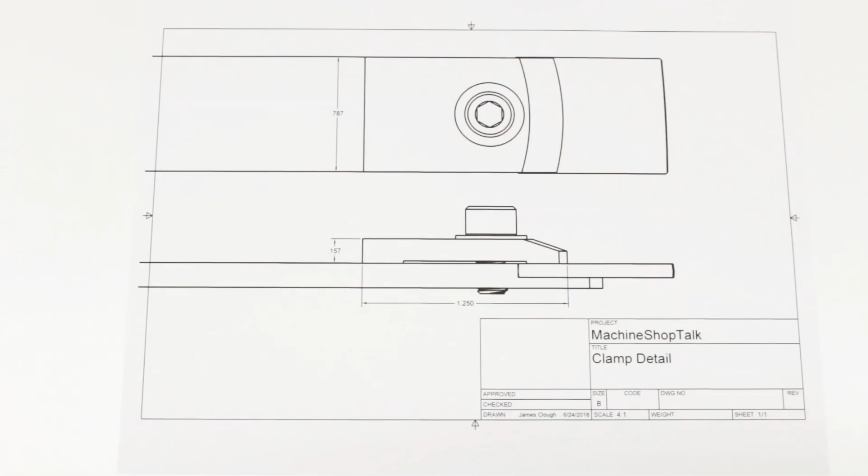Last time we finished machining the shank of the tool, including the taper for the handle and the pocket to hold the carbide insert. This time we are going to make the clamp that holds the carbide insert into that pocket. This drawing shows the detail of the clamp end of the scraper.

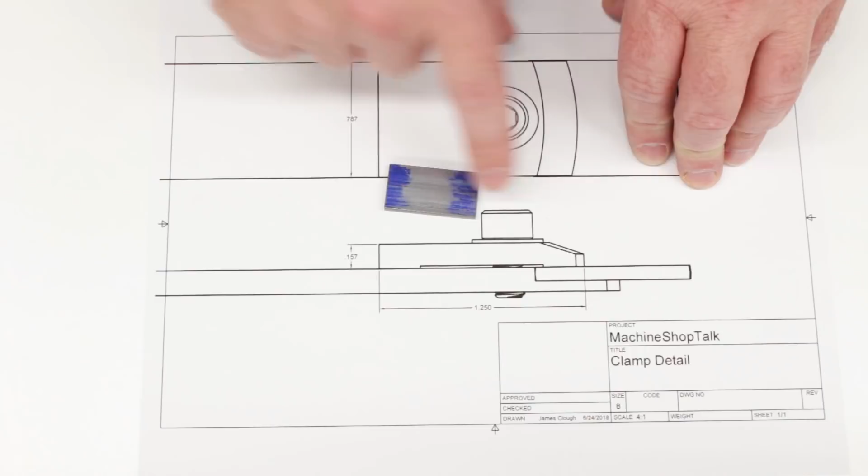You've got the shank material coming in here with the step we machined last time to hold the carbide insert. The carbide insert slides in here, and of course these are a different scale. Then there's a clamp that holds it down. The clamp is just made from a piece of flat bar, same material as the shank, but it has a couple of important features.

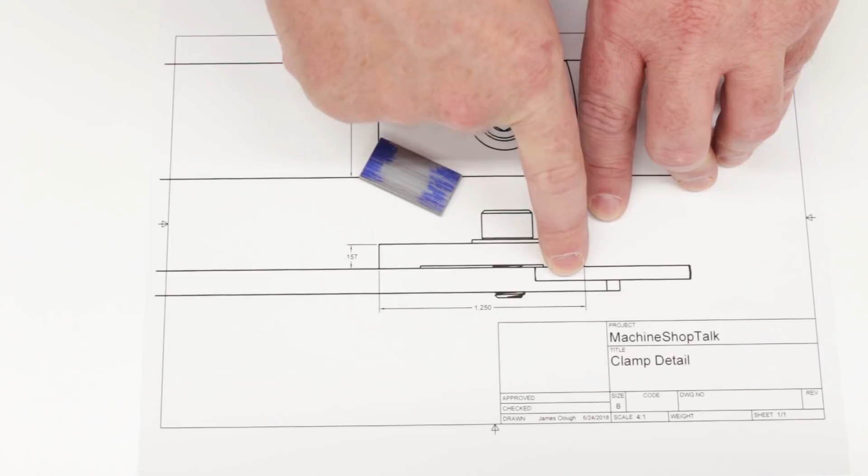There is a recess underneath, and you can see it here. It's only 10 or 15 thousandths - I'd have to go back and look at the drawing, unfortunately I didn't dimension that here. It's not very deep, just enough to make sure that the clamp isn't bottoming on the edge of the shank, and that the pad on the end of the clamp is bottoming on the carbide insert itself.

The other thing here, besides the hole for the clamping, is there's a ramp on the top end, and that ramp is actually curved - this is more of an aesthetic thing. You absolutely would not have to do this.

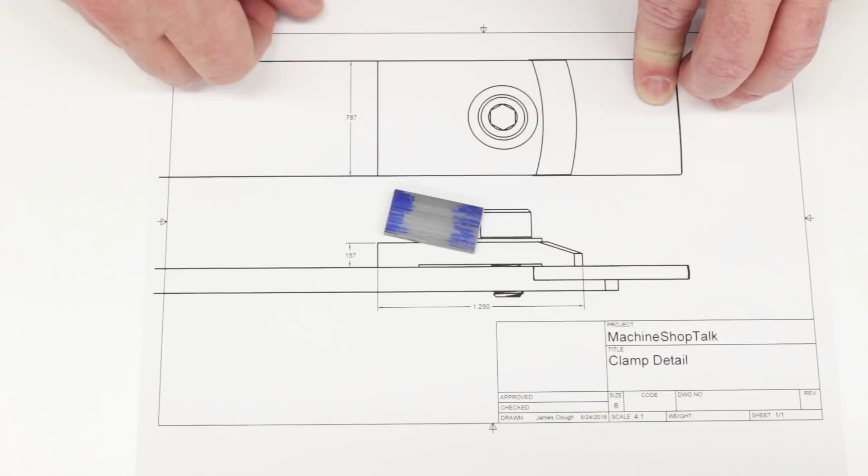You could take this bar exactly the way it is, mill out a little bit of a pocket on the bottom, drill a hole through it, and use it exactly as it is. But this is a hand tool, something I'm going to be handling a lot as I use it, and I want to have smooth surfaces, both for aesthetics and for handling it. My hand scrapes across this - I don't want sharp corners on the front end as I'm pushing the tool through the work.

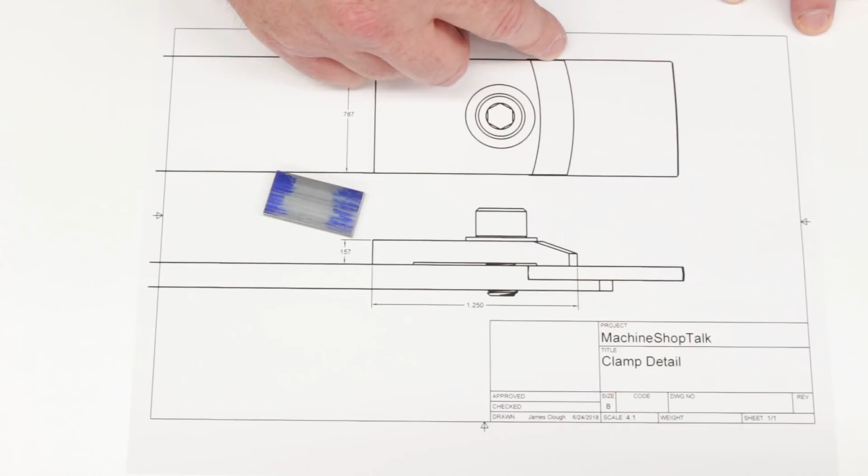So let's go over to the mill and get started. Again, I'm going to do this CNC. There's lots of ways you could do this - you could theoretically turn this, even with the nice taper and the curve, on a faceplate in the lathe, or just do this freehand with a file or on a belt grinder. There's lots of ways to do this, but again, I got the CNC mill, so that's the way I'm going to do it. Let's go over to the mill and make the clamp.

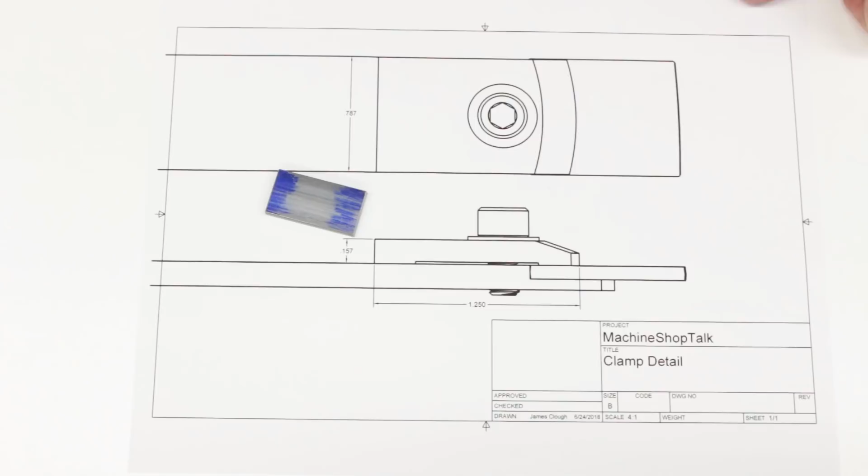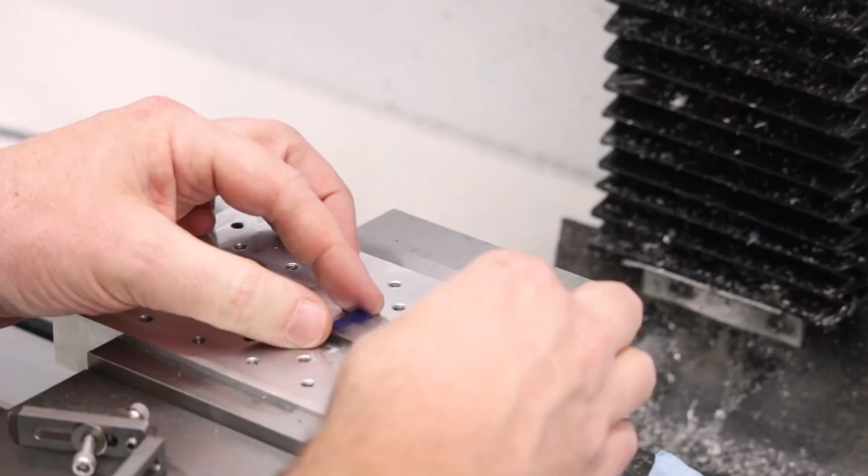Okay, this is the stock, and we need to machine it just like we were doing with the shank and the tang, which you can see here, and the front edge where you can see the marks here. We want to machine this to full depth on both ends, and the easiest way to do this is going to be with the mini pallet, just like with the bigger part. So I'll clamp it down, and unlike last time, I have the clamps ready to go.

In fact, I'm going to do the back one first here. There's a couple of things about this - this is a very, very tight setup because of the curves and the ramp that's going to be on this end. The part has to be positioned very closely to the way I planned the work holding in Fusion 360, because the tools get very, very close to the clamps.

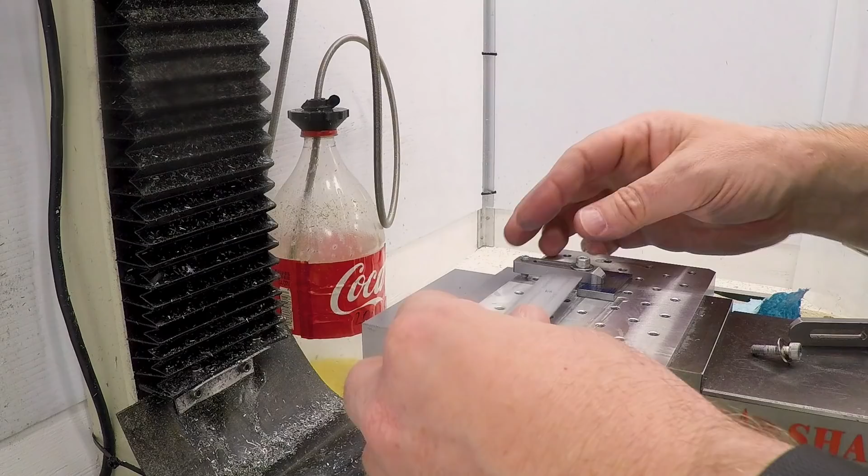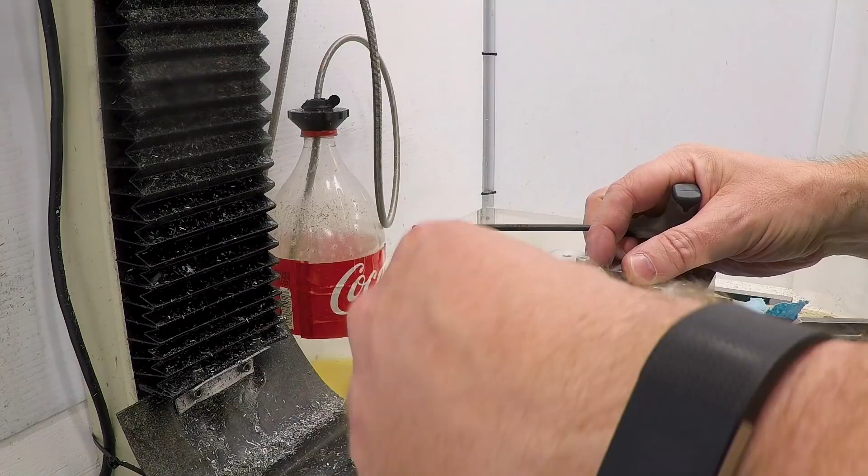So to make sure that happened, I modeled up everything in Fusion 360, including the clamps, and I took some measurements. The edge of this clamp should be 3/8 of an inch from the end of this part, and if it's not, then we'll end up not having room to spot the hole here on the other side. Okay, that looks just about right there.

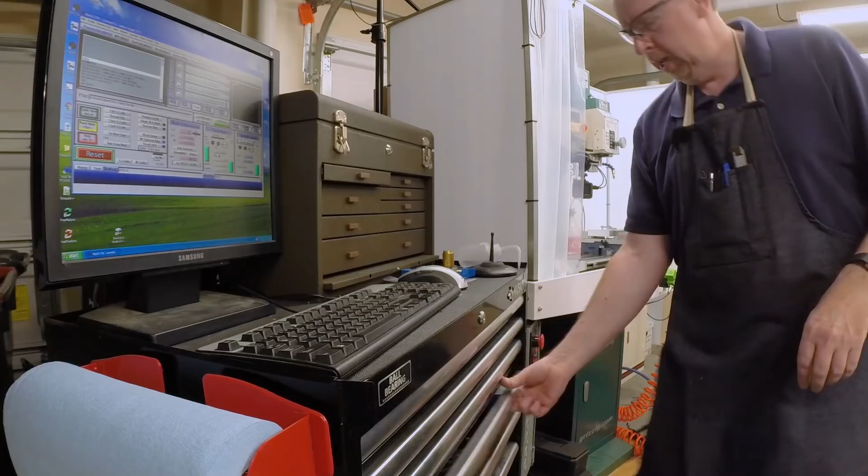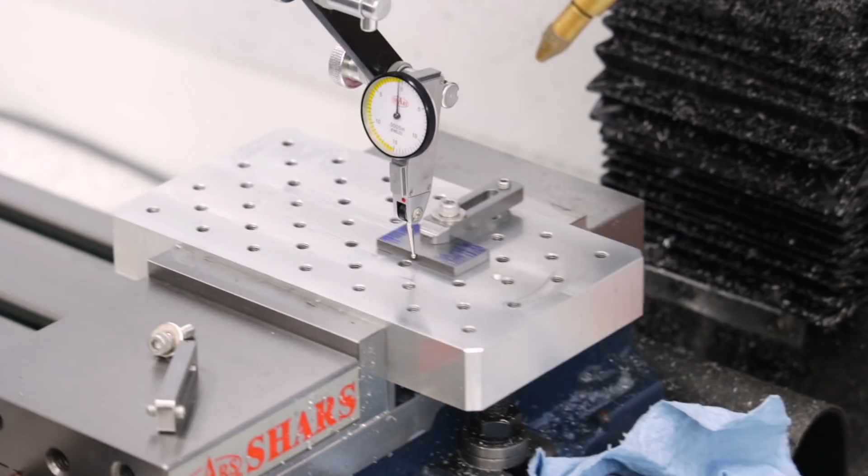Also, just like when we did the tang, we need to dial this in and get it straight. Let me grab an indicator. That side's high, that side's low.

Side's a little high, so let's give it a little tap. Okay, that's right at 0. If I go to the other end, half a thou. That is more than plenty for this particular part.

Let me put another clamp on the front side here and just make sure everything is good and tight. Okay, that's good. Let me grab an edge finder and let's locate the end of the part.

Okay, that's the left X, so we'll zero it. So that's the right X, so we'll say divide by 2. And there it is. 0 Y. And there is Y, divide by 2.

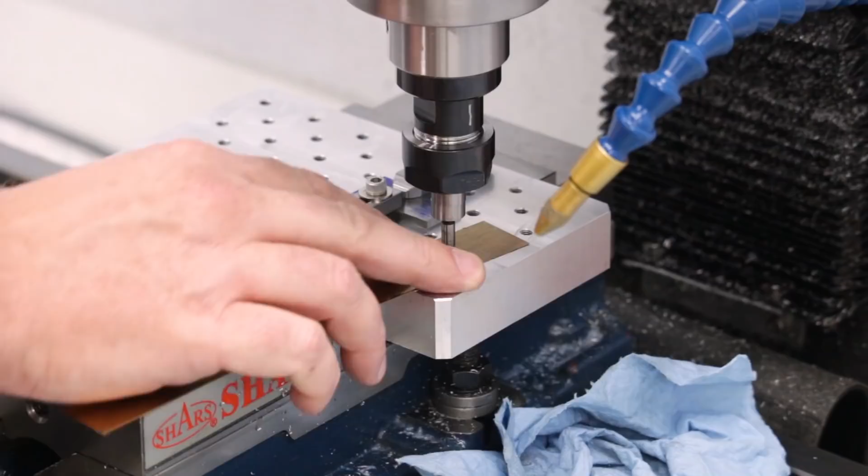And as usual, let me check the Z0, set it as well, using a 10 thou shim. Okay, that just gripped. So we'll set the Z to 10 thousandths with the offset.

Okay, the first tool is going to be tool 8, which is our 1/4 inch carbide end mill, running at 1800 RPM, 4 flutes.

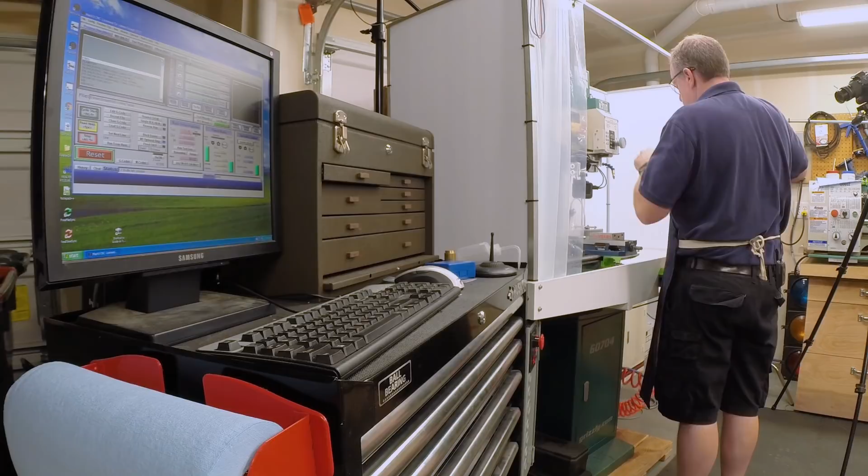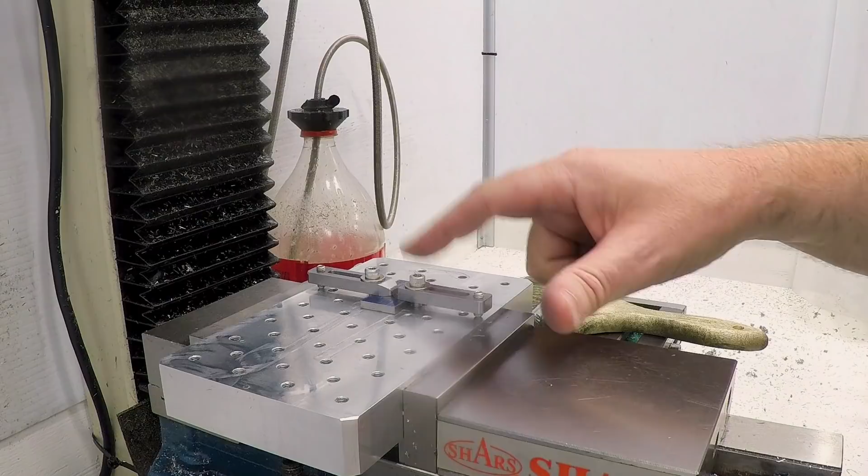Okay, we've got this all clamped down, ready to run. We've got a 4 flute carbide 1/4 inch end mill in here. We'll run at 1800 RPM, and we're going to machine both ends of this. We're going to actually cut the end curved and straight on this end and straight on this end, and then we're actually going to mill in some of the steps for the ramp, which we'll then come back and refine with a ball end mill before we drill the hole.

Now, there's a little bit of a trick here. The way I have this set up, these clamps come up well above the normal clearance retract height in Fusion 360 - and I say clearance retract because I can't remember if it's the clearance height or the retract height. But you have to get it set up so that the tool path will bring that tool up above these screws when you come across. Otherwise, you'll finish one side, pop up, and snap the tool off as it travels to the other end.

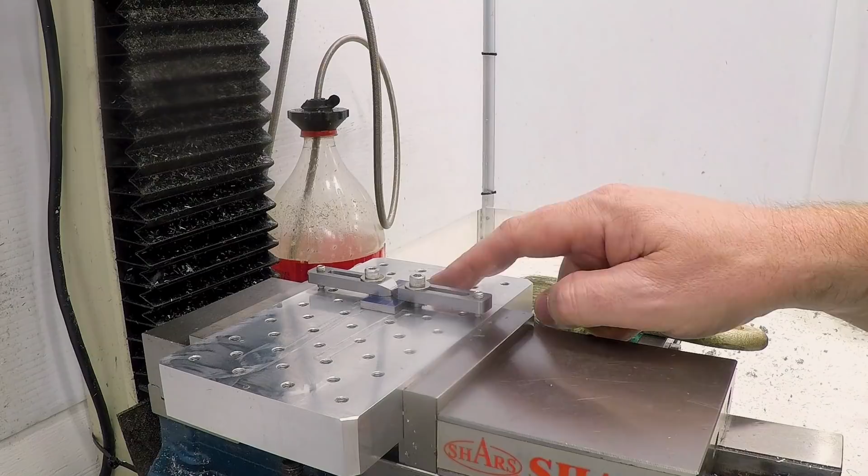And so in Fusion, I actually modeled the clamps and listed those as a fixture, so then when I simulated it, it came up and stopped and everything turned red and told me that I was going to hit the clamp until I raised those heights. We should be good now. If not, you'll get a show when we snap off an end mill. Let's go to 1800 RPM and mill this thing.

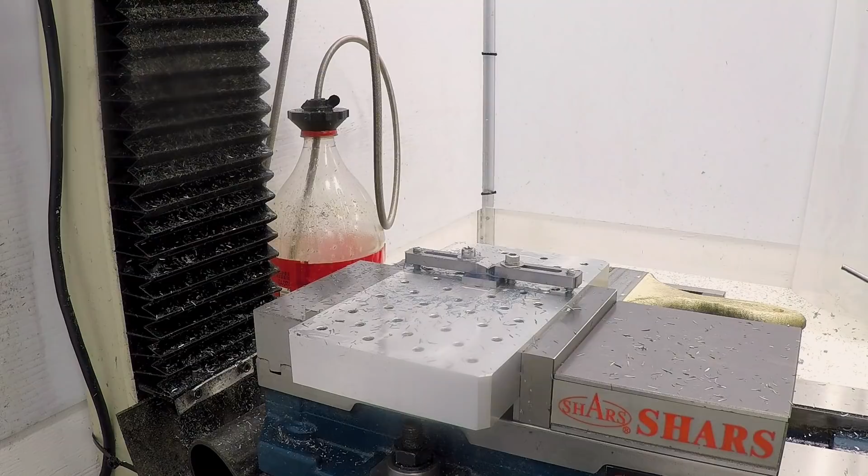Okay, we got that roughed out. Next step is a ball end mill to smooth the curve on this end.

Now this tool is only high-speed steel, so we're only going to run it around 1200 RPM. And we should just make a whole bunch of passes, 5 thou apart, to smooth out this end.

Oh yeah, that's beautiful. That was worth the trouble. Okay, next we need a spotting drill to spot the hole there.

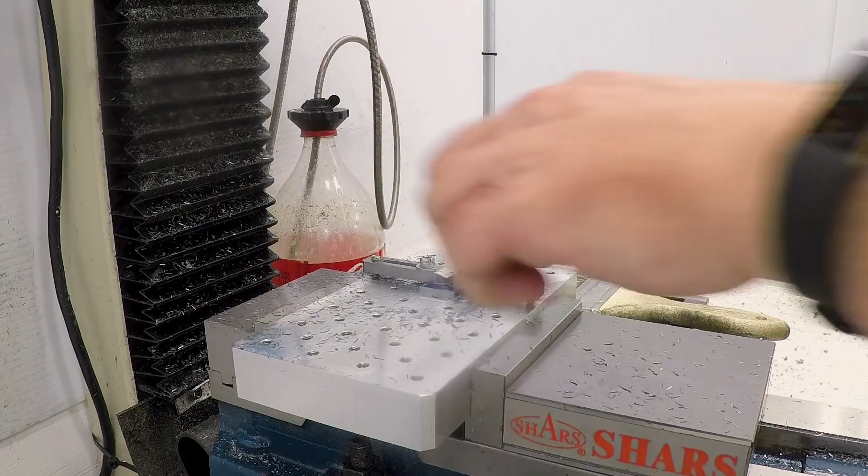And remember how I said this setup was tight? Well, it's tight - I actually just cut the clamp there. Clamp's mild steel, it's not going to be a big deal. Spot's in the right place. And the next drill to come through is going to be smaller anyway, so we should be good.

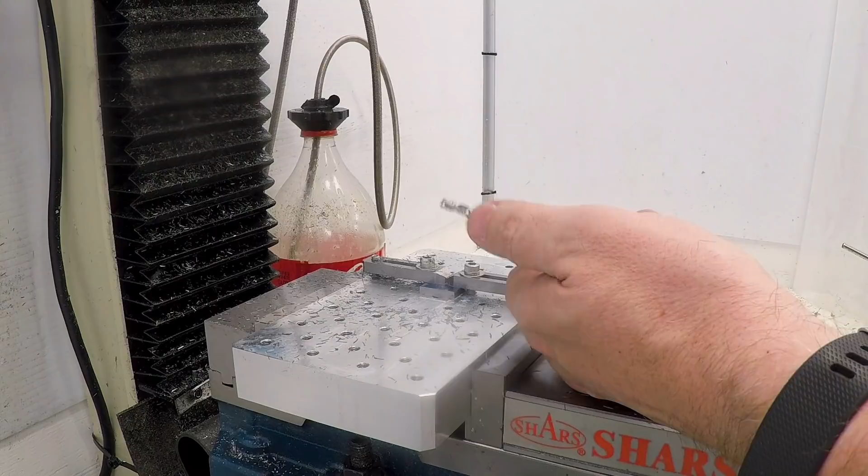Now I would say this is the same drill as last time, but it's not the same drill. This is a number 9 drill. When we did the shank, we used a number 21, which is tap size for 10-32. But for the clamp, we need clearance size, so this is a number 9, which is clearance for 10-32. And we're just going to push this through in one operation as well - no pecking, we're just going to shove it through there.

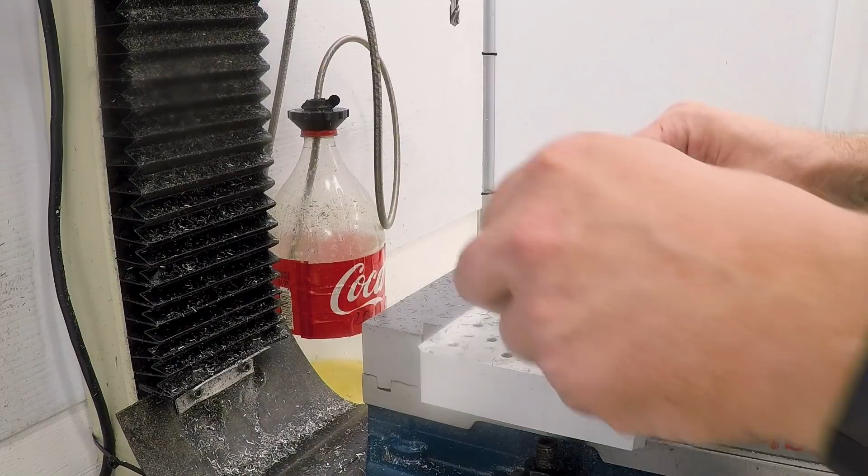And there we go, that's the clamp done. I'm very happy with how that turned out. A nice smooth edge. There's little marks from the ball end mill every 5/1000ths, but it makes kind of a nice little radial pattern. The next thing we have to do is we need to mill out a recess on the bottom of this.

Okay, we've got the front side of this milled, the top and with all the curves on the sides. I got a nice little ramp there, which just turned out beautiful. Now we need to flip it over and machine the recess in the back. And rather than try to hang on to it or do anything with the mini pallet, I think since we're only machining the top edge of this, we should be able to just hold it in the vise.

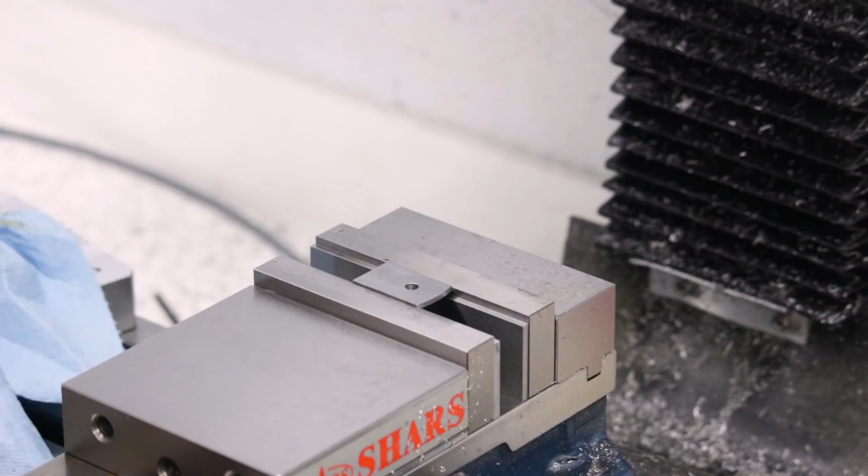Okay, so we're going to machine down from the top 15 thousandths on this. Let's see how much clearance I actually have over the vise jaws. That looks like we're at about 21 thou. And there we've got the same 21 thousandths. And again, we're only going down 15, so that should be fine. That extra 6 thousandths clearance should prevent us from milling into the vise.

Okay, let me grab an edge finder. Now because tolerances are so tight here and I only have about 6 thou to deal with, I'm going to do the Z0 with the actual tool we're going to use. And that's going to be tool 8, which again is the 4-flute carbide 1/4 inch end mill.

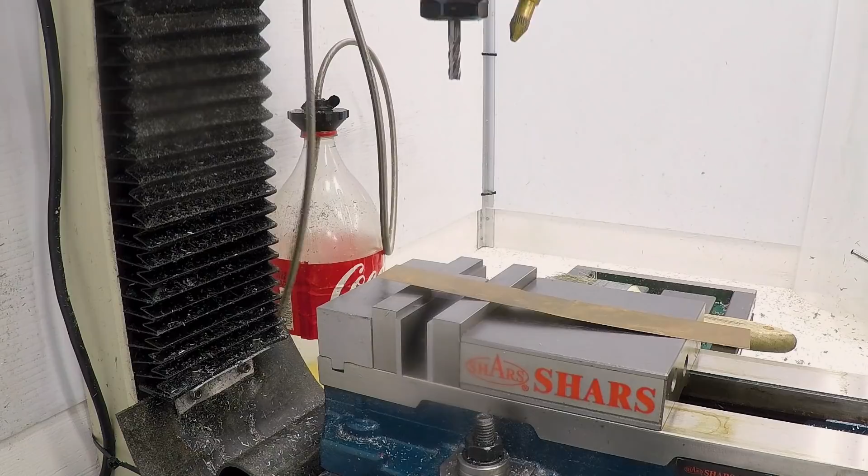Okay, I'm going to make sure I have selected tool 8 here in Mach 3 before I do the 0. And then I'm going to bring it down and 0 it as usual. Okay, just used the offsets and set the Z to 0.1. Okay, and we're set to tool 8, so we should be good, and I'm looking, the Z minimum on the program is minus 15 thou. So we should be completely clear of the vise jaws. Let's spin it up and give it a shot.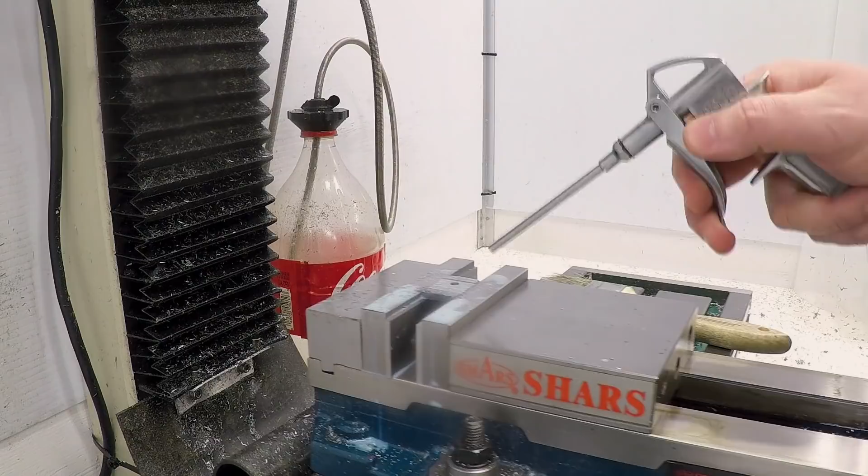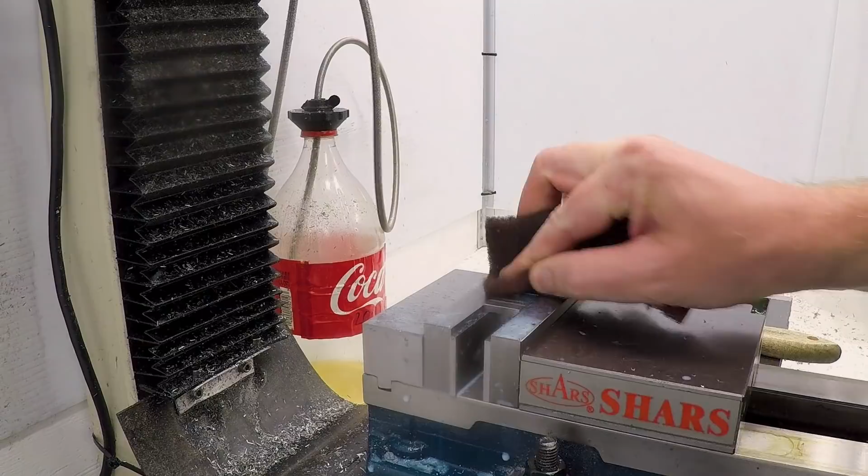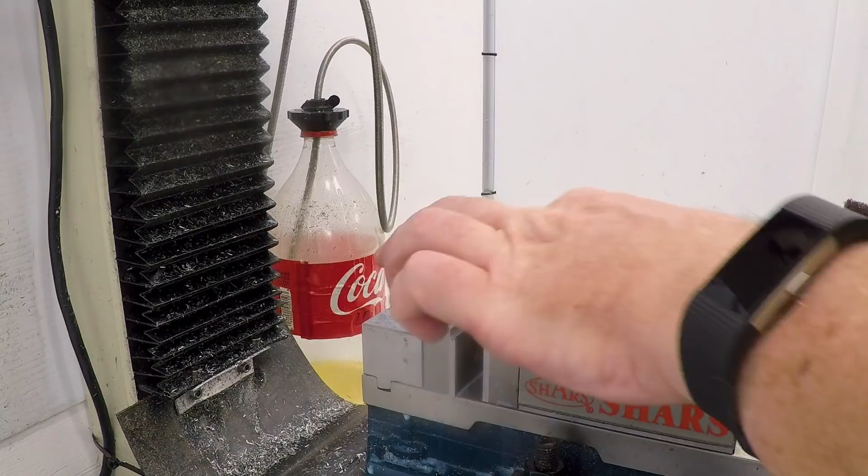There we are, 15 thousandths recess. Now I'm just going to do a little sanity check here and make sure it looks like it's going to completely clear, and it does. Okay, and while this is in here, I'm just going to do a little deburring with Scotch-Brite. Way easier to do this now than to do it after it's out because these are so shallow. Okay, I think that's it. Let's take it over to the bench. Take a look.

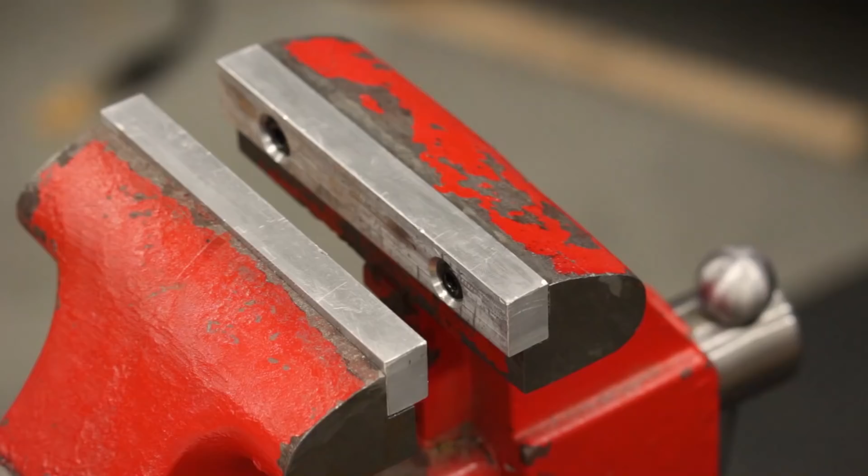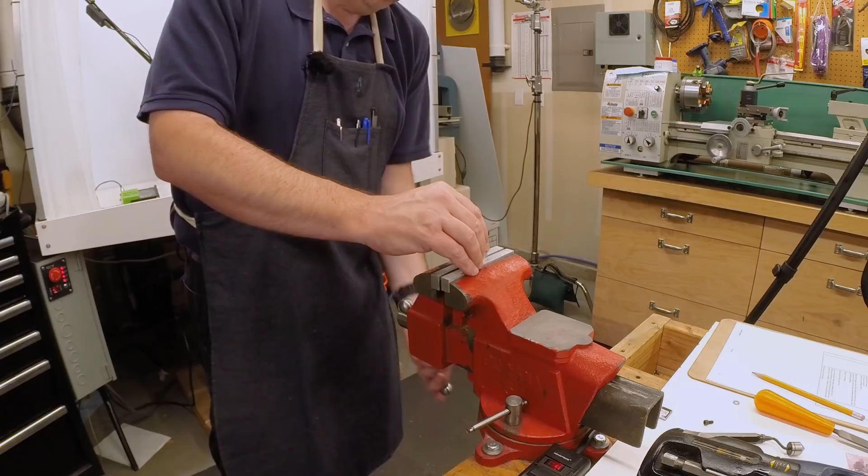Okay, that is the clamp complete. I'm really loving the little parallel marks from the tooling, that curved ramp. I really love how that turned out. I got to do more contour milling on the mill. Should need to do a little bit of deburring on this, and it should be ready to assemble. Just going to use a small file here. Take the sharp edges off of it. Actually isn't much here.

There's kind of sharp edges there, but it looks like I got most of that with the Scotch-Brite. Just touch the top and bottom of the hole to clean it up. Tiny little chamfer, just enough to be able to see it. Okay, that looks good. Recess in the bottom feels like about 15 thou, about what I was looking for. Let's put the whole thing together, or at least put the insert in, see how it works.

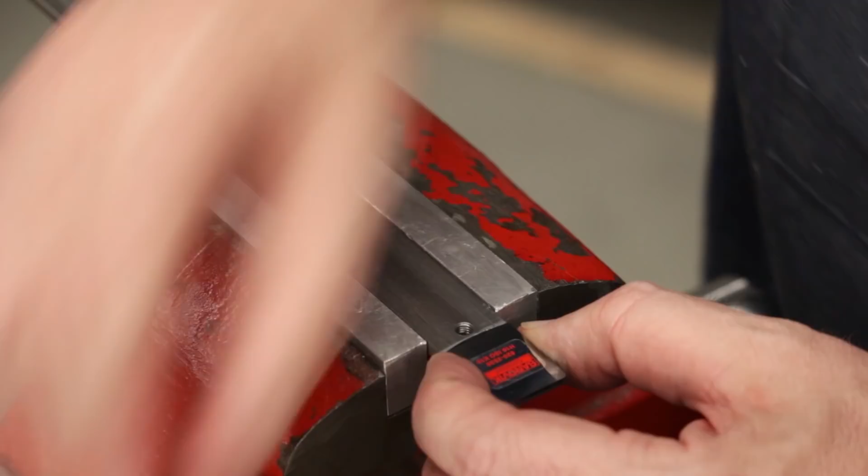That in like that. Okay, I've got the carbide insert, I've got the clamp, and I've got a number 10, a 10-32 screw, and a number 10 washer. Feels good. Let me grab a wrench. Oh yeah, that pulls down nice and solid. Oh, very nice. That looks just like the drawing. Oh yeah. There I am, scraping a little bit of aluminum off. That is going to be beautiful.

Well, I think that's it for the shank and the insert and the clamp. I think the next thing we need to work on is the handle and then the insert to go in the back, and we will work on those next time.